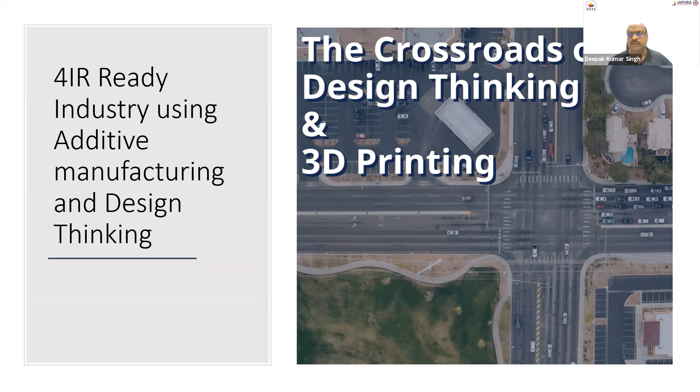Now, on the basis of my experience, in this field I have around 4 or 5 years of experience. I have a total of around 15 years of experience in industry, but in this field only 4 or 5. So you can say by virtue of that experience, I have designed the agenda of today's session.

I will try to make my session interactive, but that all obviously depends upon you. You can ask questions from me.

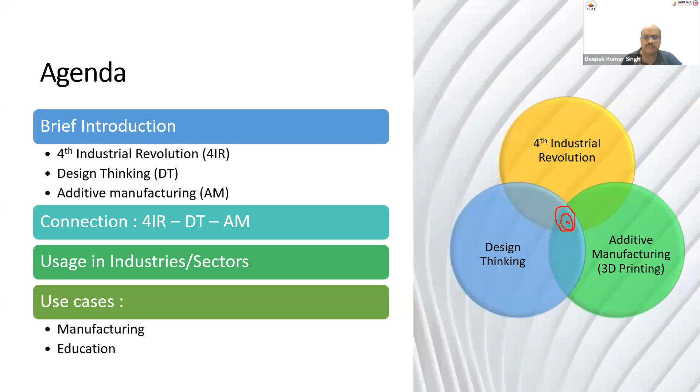So let's start with 4IR, and let's see what this is. I think most of you know what 4IR is. Can anybody answer what the fourth industrial revolution is? I think the slide is in front of you, but even then, any answers related to this?

Sir, Industry 4.0 is related to automation, use of robotics, additive manufacturing, CAD and CAM technologies, so that maximum automation can be achieved.

Okay, that's great. I was going to propose a chocolate - I will send chocolate for right answers - but I think Chinmay answered before that, so my chocolate is saved, I think. Anyway, Chinmay is very much right, and the key thing here is cyber physical system.

So in Industry 4.0, we are trying to add that online tech or automation tech with the physical system - anything related to cyber physical. For example, we are talking about IoTs. What do IoTs do? IoTs try to deploy sensors on our physical systems and make it internet ready, or throw the data on the internet. So that's a cyber physical system. Industry 4.0 can be defined in two or three words: cyber physical system.

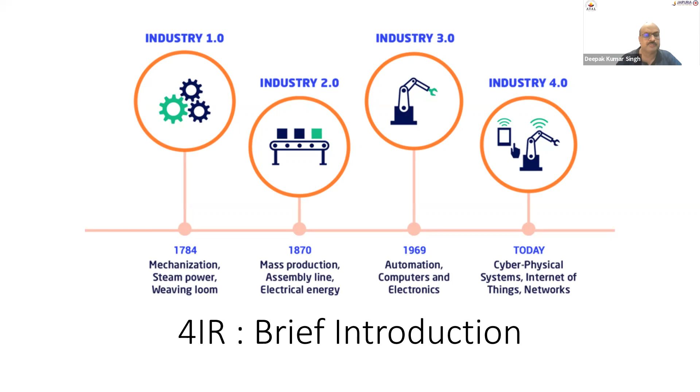And in Industry 4.0, here comes the concept of additive manufacturing. So among the big 8 or big 9 ideas related to 4IR, additive manufacturing is one of them.

You can see it here. I think you can see that.

Additive manufacturing is highly related to industries, because whether you are from service industry, food industry, any type of industry, you definitely need something physical to work in the field. Even in service industry, you need systems, laptops, devices. So that plays a huge role in the growth of manufacturing industry.

We normally say China is the leader in that. But why is China the leader? Because they took prototyping in a very specific manner. Can we create small prototyping industries? Can we create small manufacturing shops? We don't need to go for a bigger industry specifically for manufacturing. Can we do it small? And that small is the key to the success of China.

My personal opinion is nobody in the world can miniaturize things like Indians. We Indians are very good in that. So if we can miniaturize most things using Jugaad technologies, why can't we miniaturize the manufacturing industry? If we can do that, that's the key to the future. We can manufacture our goods, give jobs to a lot of people, and also we don't need to import a lot of goods from China. So miniaturization of industries is a very key factor in our economic growth.

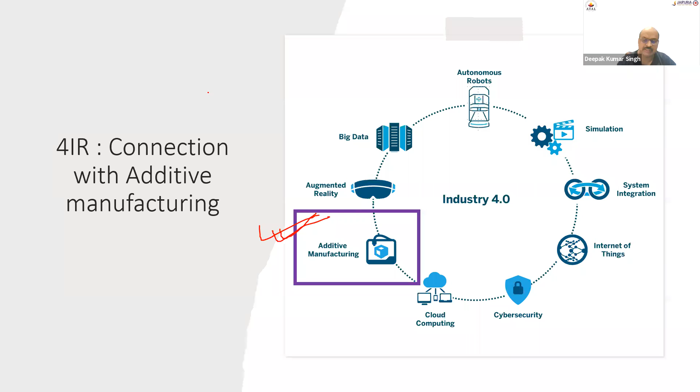Yes, there is, and that's design thinking. Now you can think how all these things are related. If you want to grow Indian GDP, you need the manufacturing sector. If you want the manufacturing sector to be strong, you need to focus on additive manufacturing. And if you want additive manufacturing to be a strong field, you need to create manpower who know about design thinking. That's why all these fields are very interrelated, and that's what I said - I will discuss the sweet spot between all of them.

I think everybody now knows, after some great sessions from Utkarsh, what design thinking is and what's the process. But I will cover it in brief. There are 5 steps specifically for design thinking: empathize, define, ideate, prototype, and test.

And that's a cycle. After ideate, you also need to test. You need to think about the problem again - have I solved that problem? You need to again define that in details. You need to again test your prototype. And if not good, then you need to develop a different prototype and then ideate.

It looks very good, the concept wise it's great. But can we do that again and again? Is it possible? For example, we are a big manufacturing industry, and we came with an idea of anything, maybe a bottle of sanitizer, and somebody said that's just not good.

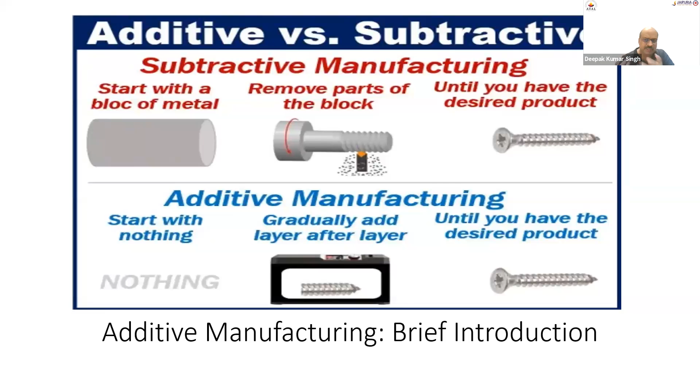So if you are talking about manufacturing industries and 4IR, you can see three things can be changed using additive manufacturing and design thinking. The first is obviously additive manufacturing - it means we can rapid prototype, create objects in various shapes and sizes, and so on.

The second thing, we are trying to combine physical and computational items. How to combine that? That knowledge comes from design thinking. There are two types of employees in manufacturing industry - one who knows how to manufacture, and one who knows how to design - but collaborating between the two is a very tough task. So there comes the idea of design thinking.

If both of them know the concept of design thinking, they can work in tandem. And hence you see a cyber-physical system coming up, which consists of a lot of software and collaboration tools, and a concept of design thinking working in the background, which can bring that team together to make a product useful for customers.

And not only that, if you follow the processes in design thinking, you can automate it also. So this brings the key idea of automation and robotics also in this field of 4IR.

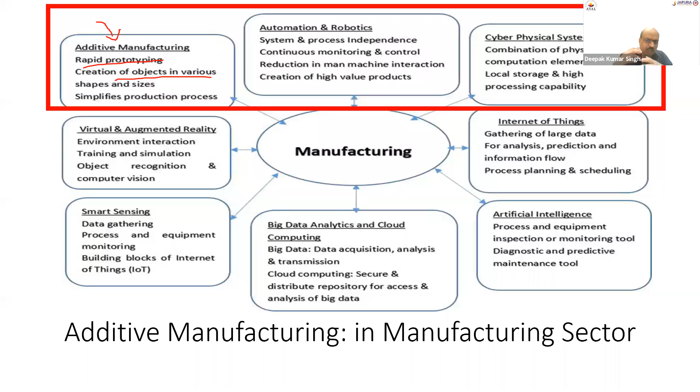So how does that amalgamation work? There is some 4IR related tech - specifically I'm talking about manufacturing. There are additive manufacturing technologies, and there are design thinking related processes or frameworks. We need to mix these things up, and the sweet spot is very good for manufacturing startups.

This amalgamation of additive manufacturing, 3D printing, and design thinking is very good for the education sector. When I say education sector, everyone asks: is it even possible to apply additive manufacturing and design thinking in education? Yes, it's possible. Lot of countries and companies are doing that. In India also, there are very good e-learning companies designing their pedagogy and instruction material using design thinking. Some companies are trying to implement that process in 3D manufacturing also, so they can make small blocks or instructional design items for students. That's a very interesting thing.

So you can see this 4IR tech is coming, additive manufacturing is coming on the board, design thinking is coming on the board, and that sweet spot is being created, which is very necessary for manufacturing and startups. Not only for them - if you combine only design thinking and additive manufacturing, leaving out the fourth industrial revolution, you can still do something good for education. So let's discuss all the things in detail.

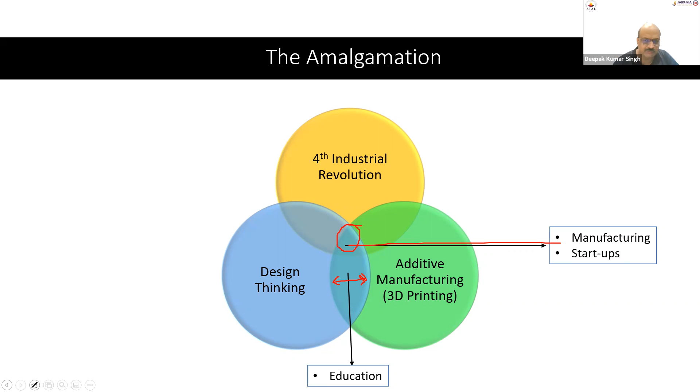So okay, this normally happens in the session after lunch. I think that's the effect of lunch on us. Anyway, no issues, let's move towards the next slide.

The first is design. Design teams can experiment with creating more complex geometric shapes and structures because of the flexibility of 3D printing technology. Not only that, you're going through the design thinking process. If a client says they need some complex geometric shape, you can ask: are you taking care of the empathy of your customers or not? If you're ready, design according to that, and if you're in the design team, show it to your prototyping team. The prototyping team has the capability and flexibility of a 3D printer, so they will print that. After printing, you can take that product back to your customer and ask: is this the complex geometric shape you want?

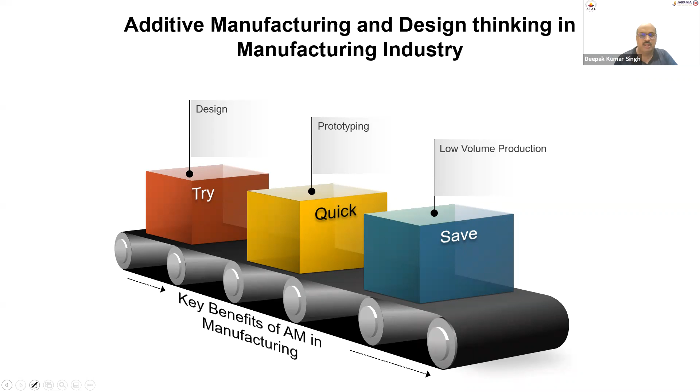So how to implement that? If we have a legacy manufacturing plant, is it possible to do that? Yes, it's possible. And here I will tell you a very important concept at the end of this slide, so please focus on this.

So you can start with your legacy manufacturing, you can shift to transformation IoT, shift to the initial ideas of 4IR technology where you can add some small 3D printers in your company for prototyping. After that, you can hire a design team. If the design team is there, you can skill your design team and manufacturing team. You can try to collaborate them, make them sit in a class and learn design thinking.

There are a lot of opportunities here for faculty attending this. You can go to industries and tell them, I know design thinking, I know additive manufacturing, and I'm ready to take sessions for your design team and for your manufacturing team. And if they can both collaborate, they can do wonders.

Not only your industry is going to change, but you are going to create new business models altogether. For example, there is a business model named factory as a service. It's not very famous in India, but in Europe and other developed countries, it's coming in a big manner. You can set up your own manufacturing industry in which the manufacturing is not concentrated on a specific domain.

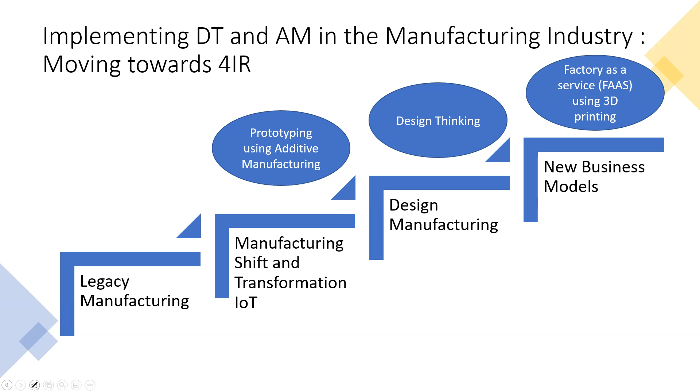Once upon a time I consulted a transformer company. They wanted to change a very small part in their transformer, and for that we needed to design it, and then it went to the manufacturing plant. A lot of steel was wasted. They built something, bought something, and tried to fix it in their old transformer, and that was not fixing - the size was not good. So they changed the size. Because the size changed, all the design changed, all the electrical standards changed, and a lot of problems were created. But again, they did that.

The design changed, the design went to manufacturing, and when that new part came, it also didn't fit with the old transformer. So that happens a lot.

So if you tell some design or manufacturing guys that factory as a service is also possible and fast - you can just upload your design, and in the next few days you will get a courier of it - they will definitely jump at it. So is it possible? Yeah, great. So can we go for that?

So that's an idea for entrepreneurs, all the entrepreneurs out there, all the incubations out there, all the teachers who help students become entrepreneurs, if they can set up their factory as a service thing, specifically using 3D printers. So that's the basic idea. This idea is given by NASSCOM - half of this slide I've taken from an idea of NASSCOM.

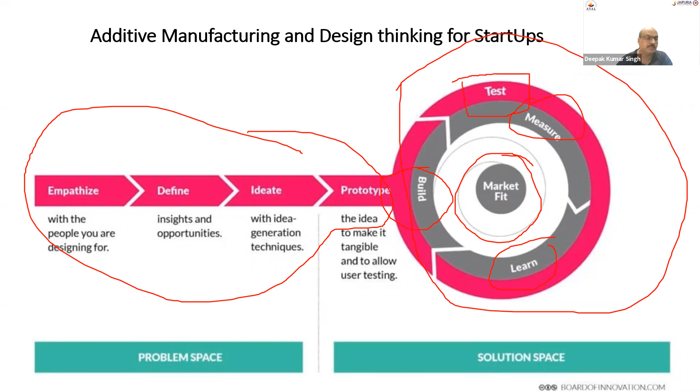You can break that problem space into multiple parts using the design thinking approach, and the solution part can be captured by 3D printing, especially if you are in product space, not service space. So you can do all the build, measure, learn by your failures, and derive a market fit very fast using 3D printing technology. That testing part of design thinking can be drawn from there, brought to the solution space, and implemented by 3D printing ideas. If you're related with any startup, you'll definitely enjoy that.

So in the last slide, I told you that if you're related to manufacturing industry, you're going to enjoy this. And if you're related to startup industry, you're going to enjoy this. Your problem space is solved, your solution space is solved.

So for MVP, minimum viable product, you can go for it quite fast, and you can go for acquiring customers very fast. The journey from ideation stage to prototype to MVP to acquiring customers will be so fast you can't even imagine. All these unicorns have taken around 3 to 4 years from ideation stage to MVP.

Unicorns, I think everybody knows unicorns - the startups which are around $1 billion. This journey can be covered in much less time if you use design thinking methodologies and additive manufacturing methodology. So your problem space is solved, your solution space is solved, and you just go launch your product in the market.

I think now everybody knows about this problem space and solution space. If you don't know that, there's a book by Dan Olsen, specifically the Lean Product Playbook. Try to go through that. It tells very detailed things about startups, and in that book you'll learn that without using these two words of design thinking and additive manufacturing, the author is talking about these technologies.

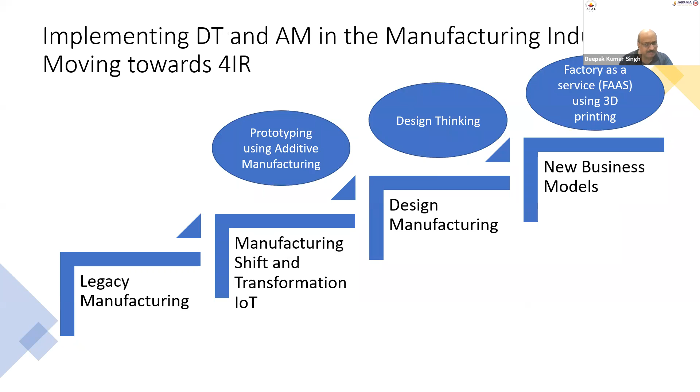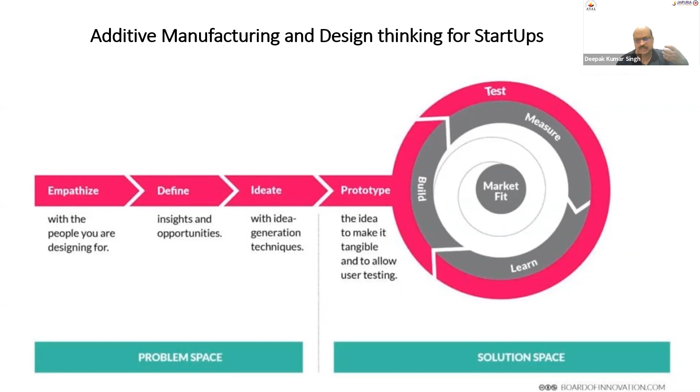So this is about legacy manufacturing, big manufacturing units, and startups. But what about teachers? We all are teachers here - I'm also a teacher, you also are a teacher. So is DT or AM, or maybe one of them, going to help us in teaching also? Yes, it can help you in teaching also.

Now you can see I'm capturing the same type of slides which Utkarsh used. So empathy is the first part, and in that you can think: who are your students? What matters to them? You're trying to connect with your students - try to build relationship, try to build on shared issues.

For example, when I was a student, I always sat on the back bench. So when I'm teaching, I try to question all the backbencher students - can you answer this, can you answer that? They are fed up with me. So I can do that here also, because all the participants are now behaving as backbenchers - nobody is answering questions, nobody is asking anything.

So definitely you need to relate, because at one point in your past you were also a student, so you can relate - definitely empathy is there. Using that empathy, you can design lessons that will help those students. You can observe, interact, and ask questions to students, and on that basis you can step out of your comfort zone and design something, think something. For example...

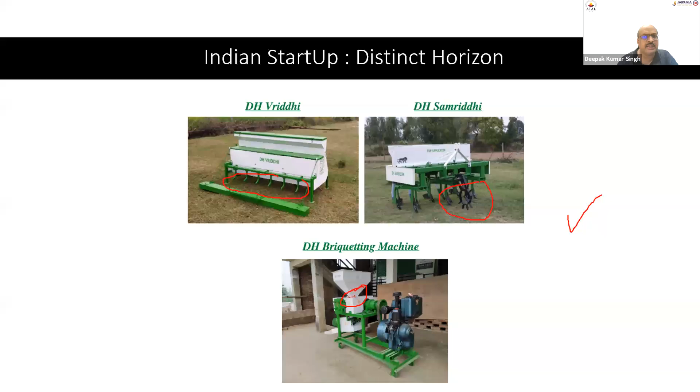So the dream of the Indian government of doubling the income of farmers rests on the shoulders of these types of startups, who can do wonders in machine equipment and maybe food processing, etc. So that's an Indian startup. Apart from that, a lot of unicorns, a lot of industries out there are working on this type of thing.

So here I'm using the service industry as an example of design thinking, not an example of additive manufacturing. Airbnb innovated its approach - initially Airbnb was a failed startup, but they transformed their journey using design thinking methodologies, and now everybody knows about Airbnb. It's a $1 billion business. Same with Netflix - they stayed ahead of their competition by following a design thinking process.

So if you think about why Netflix is doing very well, you can think of just a simple word: empathizing with their audience. In fact, they predict customer preferences using this empathizing method. Third is a big company, Home Depot - again a classic example of how design thinking can drive the manufacturing area. Home Depot is also planning to use 3D manufacturing; in fact, for some parts of items, they are still using that. That's why these unicorns or big industries are playing a big role in propagating the idea of DT plus AM.

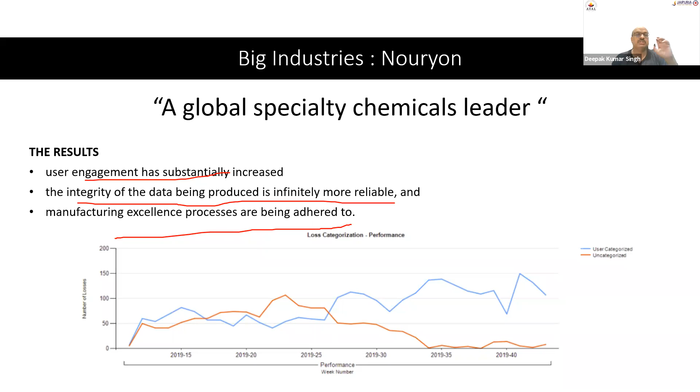So that idea changed their processes a lot, and you can see - from startups, from Indian startups, to unicorns, to world-level unicorns, and also to big companies like Nouryon - everybody is trying to use this amalgamation of design thinking and additive manufacturing.

So in education too, somebody said that school education is using this a lot. So I have some ideas related to school education itself - for example, problem solving lessons using fairy tales and 3D designs. That's a very niche thing done by one school in the US. What they normally do is tell a fairy tale to students, for example the Three Little Pigs. In that story, somebody came and destroyed the house of the Three Little Pigs.

So now the problem statement is that the big bad wolf can blow down the houses. So what you can do is design a house so strong that it cannot be easily blown down. That's a problem statement given to students, especially class 5th and class 6th students. So they designed a house, followed some basic steps, and on that basis they designed a house, and after that they printed it. That's also a great idea used in school education.

I'm not saying you can use it in all aspects of higher education, but yes, especially for first year students, you can teach them how to solve problems. And if they can solve the problem, if they can design something, you can give a printout to them - that will definitely motivate them. Yeah, that's the thing you can do. Similarly, junior teachers can use a lot of fairy tales to give the idea of design thinking to students and try to print their designs using a 3D printer.

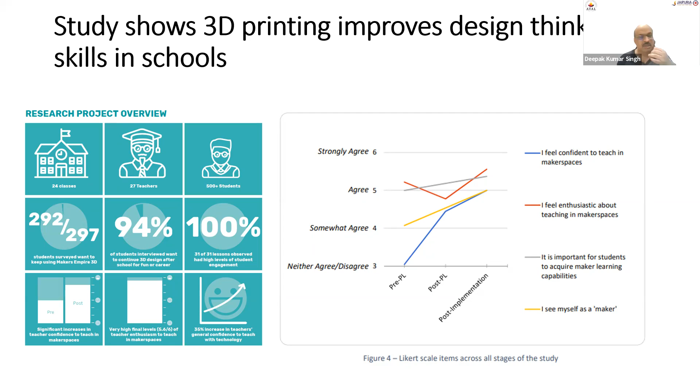In the US, one school tried to implement this with cerebral palsy girls, and these girls were able to design something using the design thinking methodology. That's very fascinating—they were able to design something and also printed it. They solved a problem, and not only solved a problem, they made something physical out of it.

Apart from that, the school created personalized small bag tags for students, designed by the students themselves—not for themselves, but through random sampling. For example, Deepak Singh is trying to design a tag for Dr. Pritam Suman, and he needs to get Dr. Pritam Suman's idea of what color he likes, what shape he likes, and so on.

And that increased the connection between students. So that's also a method of making teams—teaching them how to work in teams and how team spirit develops. Apart from that, one school tried to print small dustbins or small equipment, like dust pads to pick up dust, and used that to clean up local pollution, motivating students to make things that help reduce pollution and local garbage.